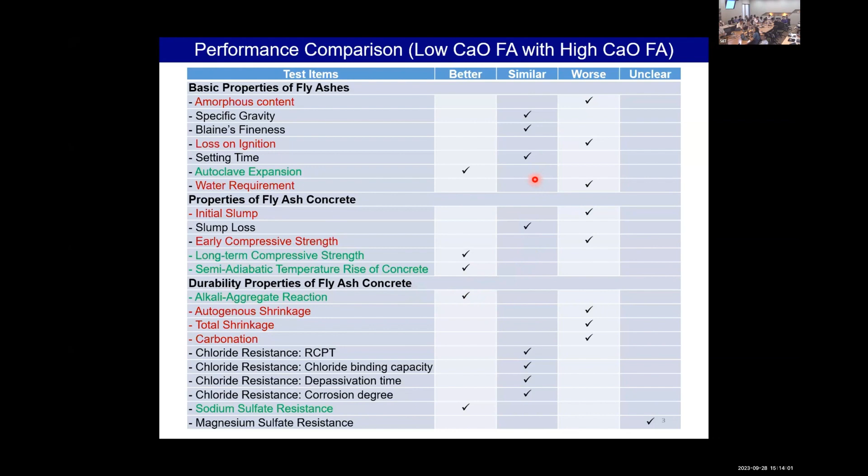For example, if we compare the properties of concrete containing low calcium oxide fly ash, properties like autoclave expansion, long-term compressive strength, temperature rise, or alkali-silica reaction of the low CaO fly ash are better than the high CaO fly ash. Some properties are similar, but some are worse.

So in Thailand, the Thai Industrial Standard for fly ash classifies fly ash into three classes. Class 1 is processed fly ash. Class 2 is the original non-processed fly ash, divided into 2A and 2B: 2A is low calcium, 2B is high calcium. And class 3 is for low quality fly ash.

This table shows the chemical and physical requirements for the fly ash. In Thailand, the fly ash used in the concrete industry follows class 2. Class 2 is divided into 2A and 2B based on calcium oxide content: if calcium oxide is less than 10%, it's classified as type A; type B has calcium oxide not less than 10%.

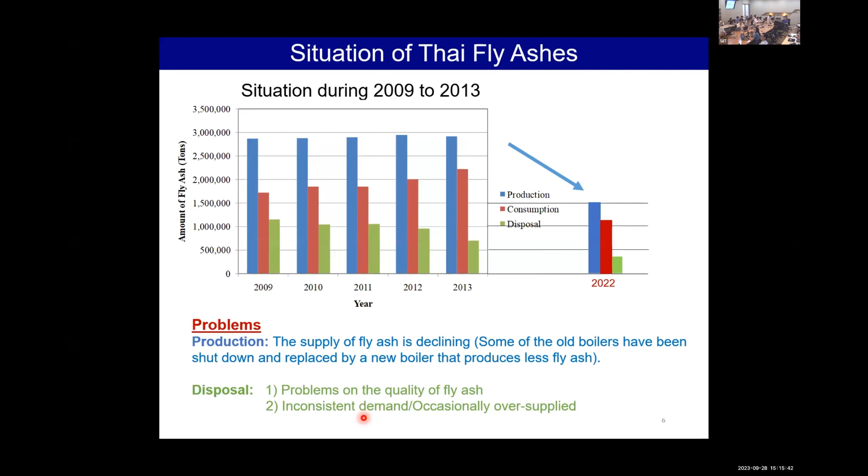For the situation of fly ash right now: about 10 years ago, fly ash production was about 3 million tons per year, but recently, last year, production of fly ash has been reduced. This is because some of the old boilers at Mae Moh power plant have been shut down and replaced by new boilers that produce less fly ash. There's also some amount of fly ash disposed of due to quality problems, inconsistent demand, and occasional oversupply of fly ash.

The problems with fly ash properties are: very high calcium oxide or low silicon dioxide content, high carbon content, high sulfur trioxide content, ammoniated fly ash, and lastly, dumped fly ash having high moisture content, or what we can call wet fly ash.

So in order to solve the problem that the amount of fly ash will be declining in the future, off-spec fly ash should be effectively utilized in concrete if its performance is better than OPC alone.

Let's start with the first problem: very high calcium oxide content or low silicon dioxide content. This graph shows data from EGAT, showing that the calcium oxide content tends to be increasing. This comes from the change in the coal properties.

When the calcium oxide content increases, the amount of silicon dioxide decreases. From this figure, we can see that in many samples, the silicon dioxide content is lower than the standard requirement, which is about 30% for the TIS standard. So the reduction in silicon dioxide may affect the reactivity of the fly ash.

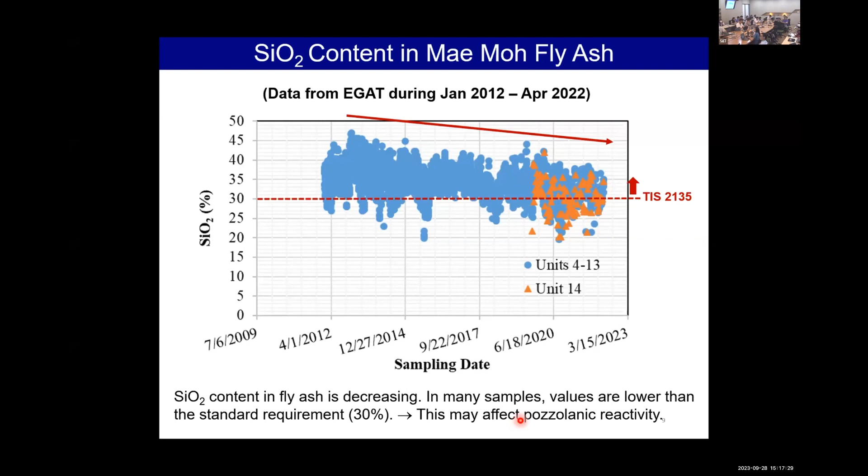This shows the relationship between silicon dioxide and the strength activity index at 7 days, 28 days, and 91 days. These are results from 3 laboratories: EGAT, ACT, and SIAT. We can see that even though fly ash has very high calcium oxide or low silicon dioxide content, the strength is not an issue.

And what about other properties? We also tested other properties, and we can see that many properties of the very high calcium oxide fly ash mixture are similar to the normal high calcium oxide fly ash mixture, and much better than cement or OPC only, like temperature rise, rapid chloride penetration, total shrinkage, and even sodium sulfate resistance.

For this data, it's questionable whether the existing standard for the limitation of silicon dioxide or calcium oxide is appropriate or not. So for this one, we may need to modify the minimum silicon dioxide or even the calcium oxide content in fly ash.

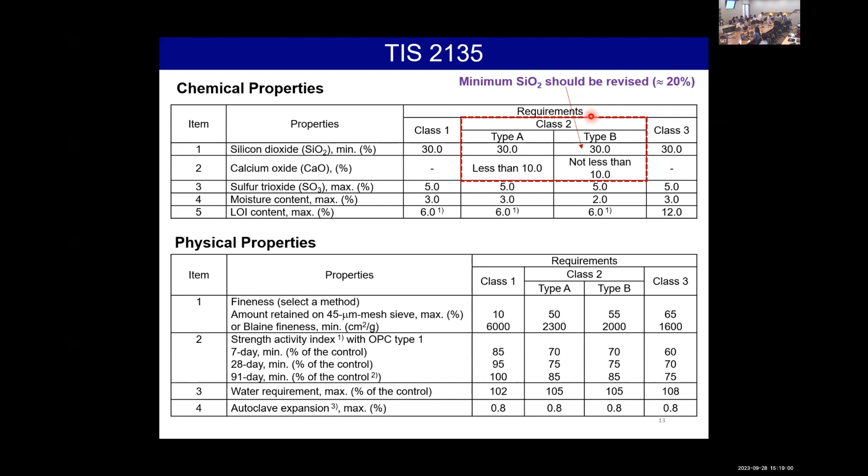Next problems are high free lime content and high sulfur trioxide content. This table shows the limitation of free lime and sulfur trioxide content. Actually for free lime content, the TIS standard has no limit. But in practice, we control the maximum free lime content to 4% based on our previous study. For other countries, ASTM or Japanese standard, there's no limit as well. It's only the EN, ISO, or Chinese standard that limit free lime to 1 for type F and 4 for type C.

We studied the properties of concrete or mortar containing high free lime and compared with low free lime fly ash. We can see that for the high free lime fly ash, it has worse properties in expansion, like autoclave expansion, alkali aggregate reaction, and sulfate resistance. But for autoclave and alkali aggregate reaction, the value is still better than OPC only. And of course, with high free lime content, setting time is faster, and for compressive strength, especially at early age, it is higher than low free lime fly ash.

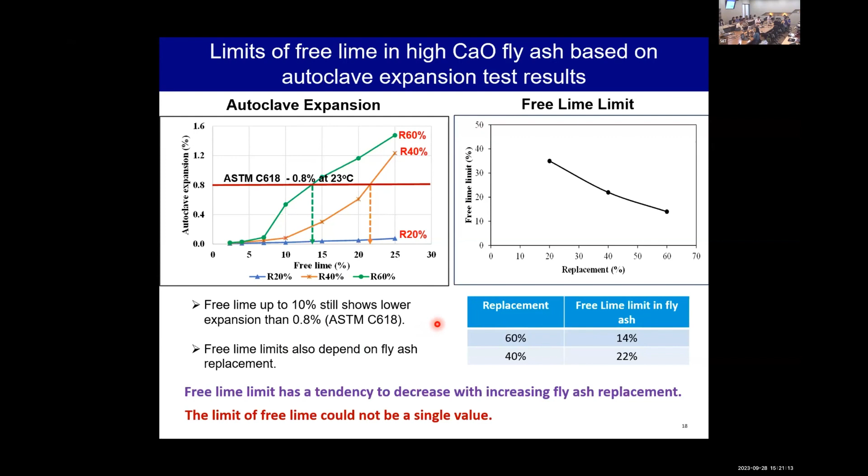Our recent research also studied to obtain the limit of free lime in high calcium oxide fly ash based on autoclave and sodium sulfate expansion. For the result, we can see that free lime up to 10% still shows lower expansion than the standard limitation. And after we obtain the limit of free lime, we can see that the free lime limit also depends on the fly ash replacement. So we can conclude that the limit of free lime could not be a single value.

We also tested sodium sulfate expansion, and from the result, we can see that even when the free lime content is increased, some values are still smaller than the OPC one. So for this data, we use the concept that the free lime limit is the maximum free lime content in fly ash that does not result in expansion greater than OPC type 1.

For our preliminary study, we can get the free lime limit. It can be seen that the free lime limit tends to increase with increasing fly ash replacement, and it tends to decrease with increasing water to binder ratio and increasing sulfur trioxide content in fly ash. So from this data, the free lime limit should be proposed considering these parameters, not just one single value.

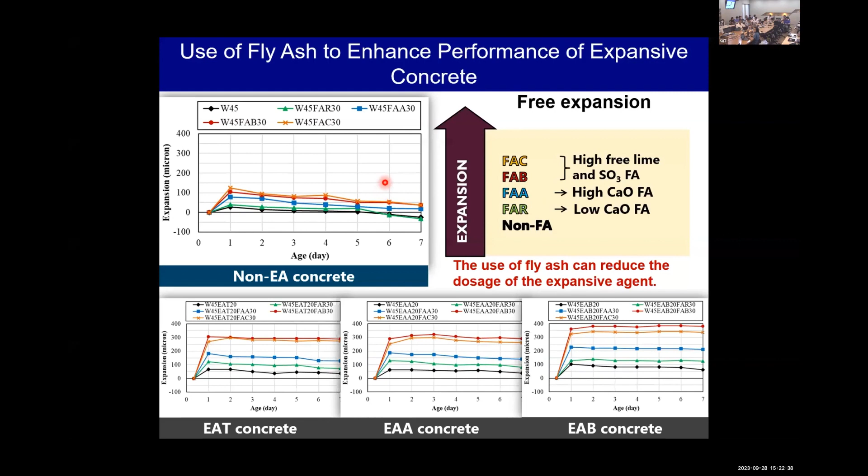High free lime and high sulfur trioxide fly ash can also be used in concrete to enhance the performance of expansive concrete. When we use fly ash, especially with high free lime and high sulfur trioxide content, the expansion of the expansive concrete is increased. This increase comes from producing more ettringite, which then increases the expansion. The mechanism can be found in our previous publication.

And not just the expansion, other properties like compressive strength can also be improved by using the high free lime and high sulfur trioxide content fly ash in expansive concrete.

Okay, next problem: ammonia contaminated fly ash. This comes from fly ash from boilers that use SCR technology to reduce NOx. For this process, we need to inject ammonia, and the ammonia can contaminate the fly ash. So for this case, we took samples from boilers with SCR that may contain ammonia contaminated fly ash, and tested basic properties like water requirement and strength activity index.

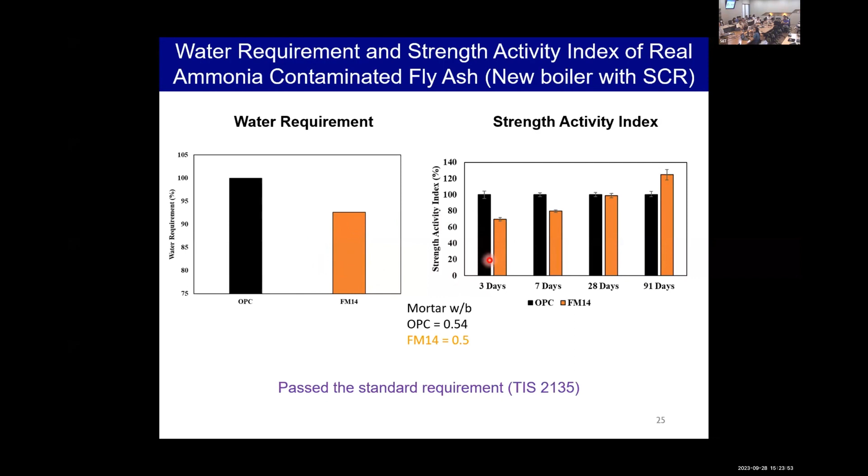We found that the fly ash from this type of boiler passed the standard requirement. Actually, for this sample, the contaminated amount may be very low. So in our study, we extended it to add ammonium salts like ammonium sulfate and ammonium carbonate, which are the common types of salt that may contaminate the fly ash, into our sample, varying the concentration of ammonia up to 1,000 ppm.

The results show that for mortar flow, the flow can be increased when the fly ash contains ammonium salt. For compressive strength, it decreases with the ammonium sulfate contaminated fly ash, but for ammonium carbonate, compressive strength can be increased.

For autogenous shrinkage, it can be reduced. But for total shrinkage, ammonium sulfate increases total shrinkage while ammonium carbonate decreases total shrinkage. For sodium sulfate expansion, when compared with the non-ammonium one, the ammonia contaminated fly ash increases expansion, but when compared with OPC only, the value is much lower than OPC. This table shows the summary of the performance of paste and mortar with ammonia contaminated fly ash compared with non-ammonium one.

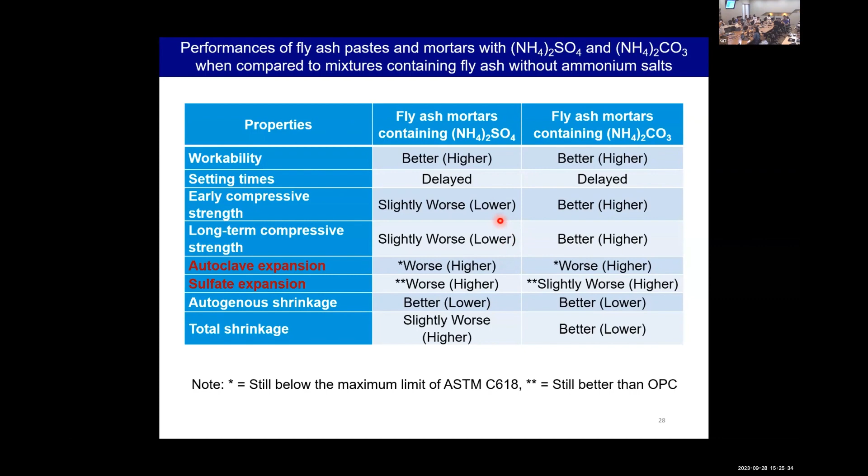Okay, for the last one: the problem about damp fly ash that has high moisture content, or wet fly ash. This is the BLCT fly ash data. We can see that there is some disposed fly ash that has to be dumped inside the power plant. This comes from the problem of inconsistent demand and occasional oversupply. Therefore, the fly ash is sprayed with water to get moisture content above 15% to 20% and dumped. So we made fly ash wet, and conducted tests comparing wet and dry fly ash.

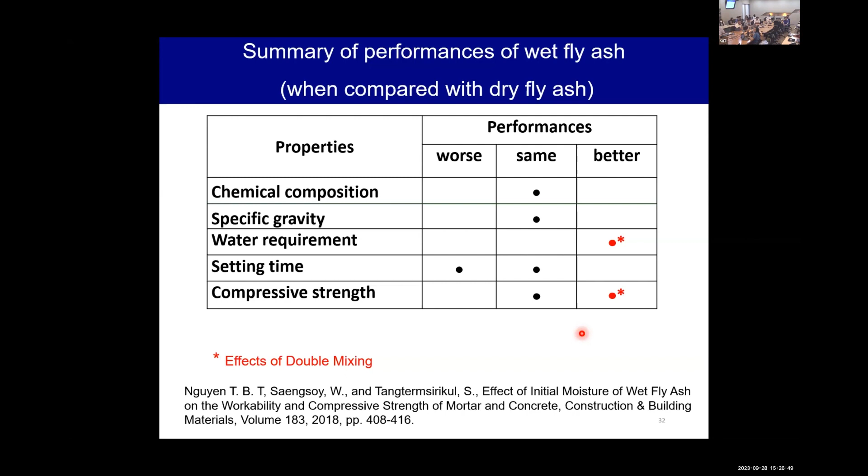We found that the wet fly ash has similar properties to the dry fly ash, but also gets better performance in terms of water requirement and compressive strength. This comes from the effect of double mixing from the pre-existence of water in the fly ash. We also published the mechanism in one paper.

We also studied the feasibility of using wet fly ash in ready-mix concrete plants, comparing wet and dry fly ash. For wet fly ash preparation, we prepared it in slurry form with moisture content of 60%, and tested at the ready-mix concrete plant, checking slump and compressive strength. Results show that wet fly ash has higher slump than dry fly ash, better slump loss, and equivalent compressive strength to dry fly ash. So we can conclude that wet fly ash or fly ash slurry can be used to produce ready-mix concrete.

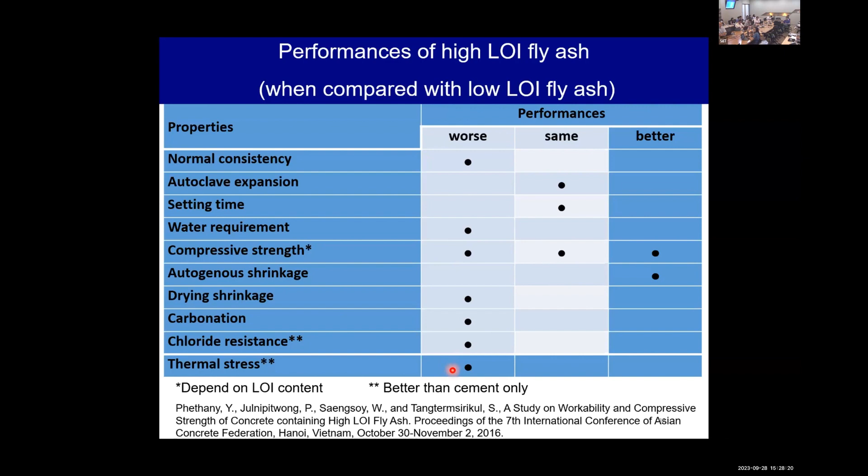The last one is a study on high LOI fly ash. Actually, this problem is from Vietnam, not Thailand. We also studied some properties comparing low and high LOI fly ash, and the results show that high LOI fly ash can produce higher strength if we properly optimize or adjust the mix proportion. For workability, even though high LOI fly ash is worse than low LOI fly ash, it is still better than OPC only, especially for properties related to temperature and thermal cracking.

In this case, the results show that the temperature of the high LOI fly ash is lower than OPC, and the restraint stress of the high LOI fly ash is lower than OPC. So it means that high LOI fly ash is very effective for thermal cracking control in mass concrete.

Okay, for conclusions and recommendations, we can see that many off-spec fly ashes have high potential for use in concrete, and more study on the use of off-spec fly ash should be carried out. Lastly, the standard specification for fly ash should be modified to allow for the beneficial use of some currently off-spec fly ash in concrete.

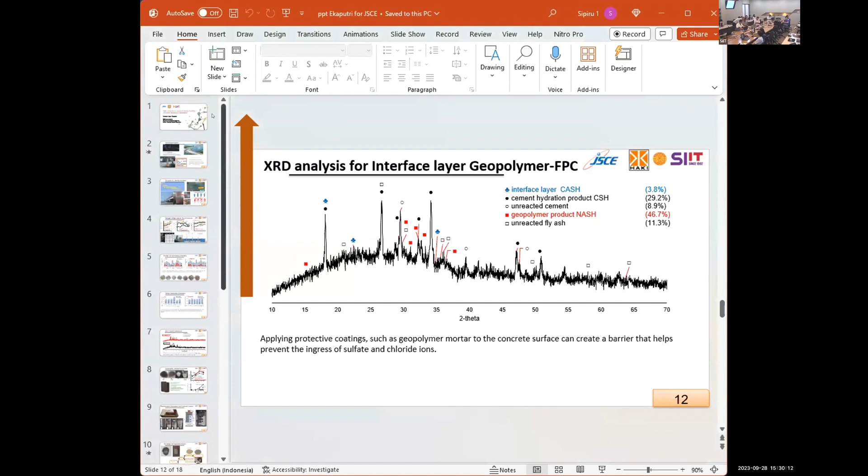Thank you very much for the invitation to the Director of International Divisions of JSCE Concrete Committee, Professor Nagai, my senpai, and to the distinguished speaker and moderator, also my senpai, Professor Asamoto. I would like to share our current research on high volume fly ash concrete and geopolymer in marine conditions.

I also work as a lecturer at ITS, Institute of Technology 10 November di Surabaya, and also as director of Geopolymer Indonesia. As we know, Indonesia is the biggest country in ASEAN with the longest coastal line, with 17,000 islands surrounded by seawater.

As the sea covers almost 71% of the territory, we have many bridges and ports exposed to the sea environment, as well as structures in the coastal area.

We are aware that seawater contains chloride ions. When concrete is exposed to seawater for a long time in this aggressive environment, it will show problems related to durability and service life issues. Cracks, strength reduction, volumetric change, and rebar corrosion are some indicators of chloride ion attack.

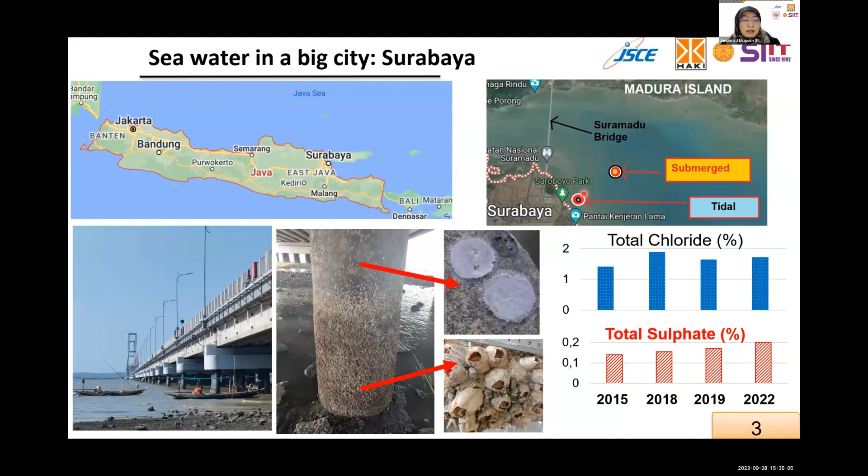This study is still ongoing, but I will share the current research. With high volume fly ash, where cement is replaced by more than 40% fly ash, we hope the concrete becomes more durable and resistant to sulfate and chloride attack.

At room temperature, with 50% cement replacement, class F fly ash shows less strength than 15% fly ash concrete. The condition is the same after submerging in seawater for around 8 months.

However, if we apply bottom ash to replace around 10% of sand, the effect of internal curing results in a positive contribution to strength. It seems that the pozzolanic reaction is guaranteed by the internal curing or internal moisture.

And here is the class C fly ash, as expected, as the previous presenter also showed.

We use 60% fly ash to replace cement, and the strength is still increasing, approaching the specimen with 25% fly ash and 0% fly ash. We believe that rich calcium and silica in the system contribute to more secondary calcium silicate hydrate formations.

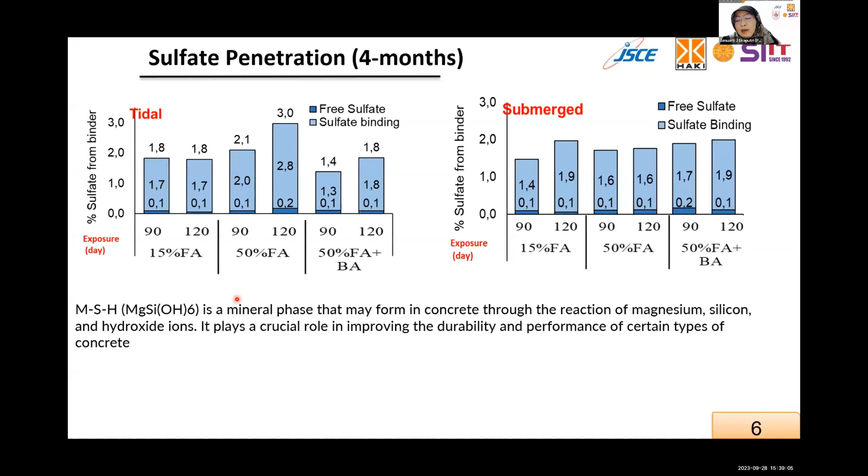We understand that calcium-based material is still very weak against aggressive ions. It is a very good idea to use very low calcium materials to cover and protect the existing concrete.

Let us see something very good about geopolymer concrete. Geopolymer material has gained recognition and popularity in recent years, primarily due to its environmentally friendly properties and potential applications in various industries. Geopolymers are inorganic amorphous materials formed through reactions of aluminosilicate source or precursors with an alkaline activator. So here we can replace 100% Portland cement with SCM, and also replace water with the alkali.

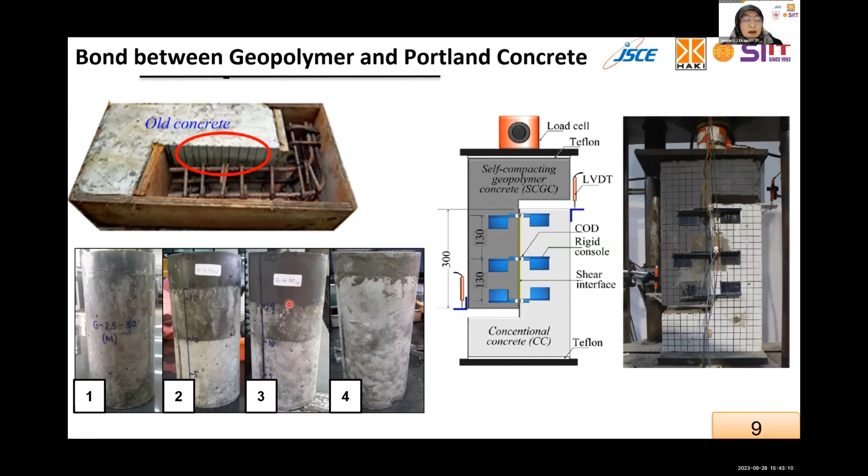It has a very great bonding system to calcium-based material. So for example, if we have an old concrete and then attach geopolymer concrete, it will have a very good bond. It is also very interesting to see that it can cover conventional concrete as a patching, and also as a cover. So it can act like a protector for repairing or jacketing of concrete.

This is the conventional mixture of geopolymer mortar. We have binder, mainly consisting of fly ash, and we can put another cementitious material like rice husk ash, or we can use GGBFS, blast furnace slag, to replace the cement in the binder. We also use alkali activator to replace the water. As a filler, we can use fine aggregate or coarse aggregate, depending on our mix design.

And this is the one that we made. The core is FPC, meaning Portland cement containing 20% of fly ash, surrounded by geopolymer mortar to cover it and protect it from the seawater.

As geopolymer attaches very well to the FPC concrete, it creates a very thin but strong layer between these materials. This is the FPC, and this is the geopolymer. We found that the interface layer is very thin, less than 1 millimeter. By using micro camera observations, we can see that the geopolymer penetrates the surface of the FPC and creates another mineral. This is what we found.

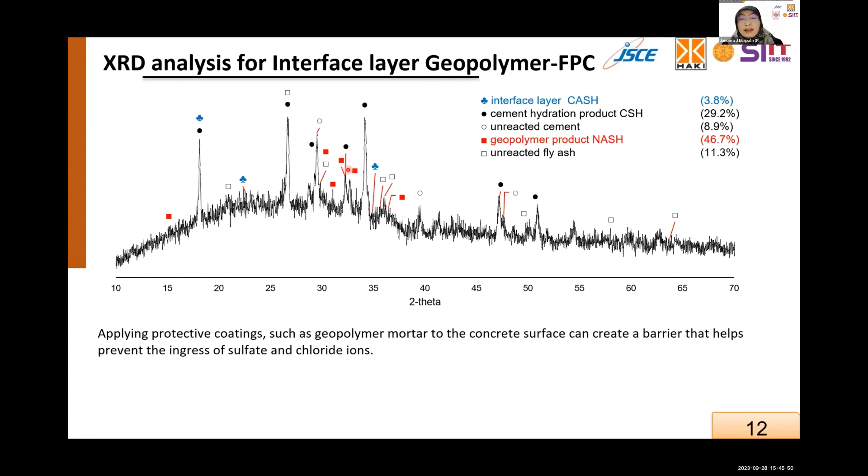The bond strength of geopolymer mortar is much better than the bond strength of PC mortar. We are aware that a cover thickness of 5 centimeters is suitable for inner concrete. So this thickness here is 5 centimeters.

This is the result when wrapped concrete was immersed in seawater, compared with jacketing made with PC mortar. A decrease of strength in wrapped concrete with FPC is shown here. However, wrapping with geopolymer mortar shows better mechanical properties. Maybe the sulfate already attacked the FPC wrapping.

In the system, as the pH increases, this shows that the releasing of hydroxyl ions is a sign of the decomposition of calcium silicate hydrate. At the 5 centimeter depth of mortar, at this inner cover point, both geopolymer and Portland mortar showed chloride binding, where free chloride ions were found in both systems.

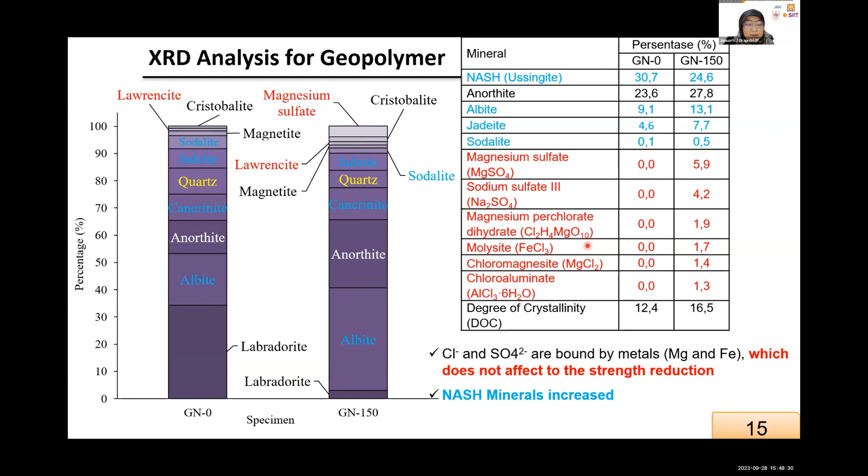Micro cracks may occur arising due to shrinkage, and maybe because of the expansion of magnesium sulfate. As the porosity of the geopolymer matrix increases in density, it becomes evident that silica derived from rice husk ash, silica fume, or blast furnace slag plays a very important role in sustaining continuous geopolymer reactions. Therefore, it inhibits the ingress of chemical attack to the matrix.

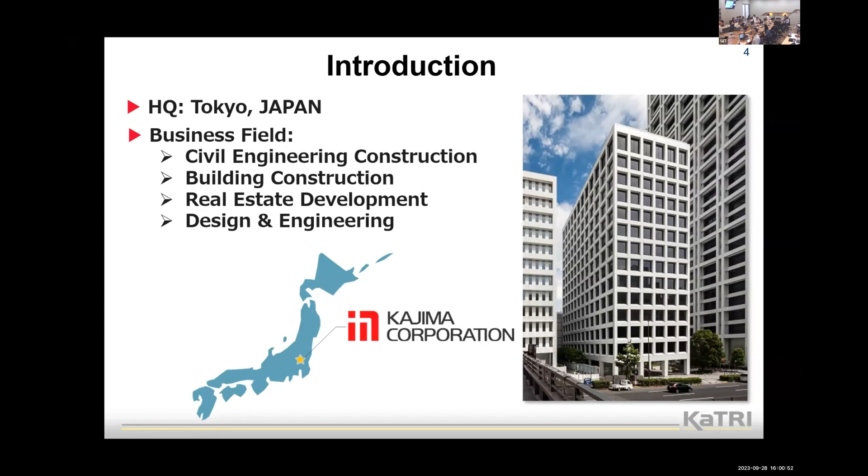The headquarters of my company is Tokyo, Japan, and the business field of my company is civil engineering construction, building construction, real estate development, design engineering, and so on.

Paid capital and our revenue is shown in this slide. Employees are almost 20,000 people, and this number includes both domestic and overseas. In Thailand, Thai Kajima is a group company of my group.

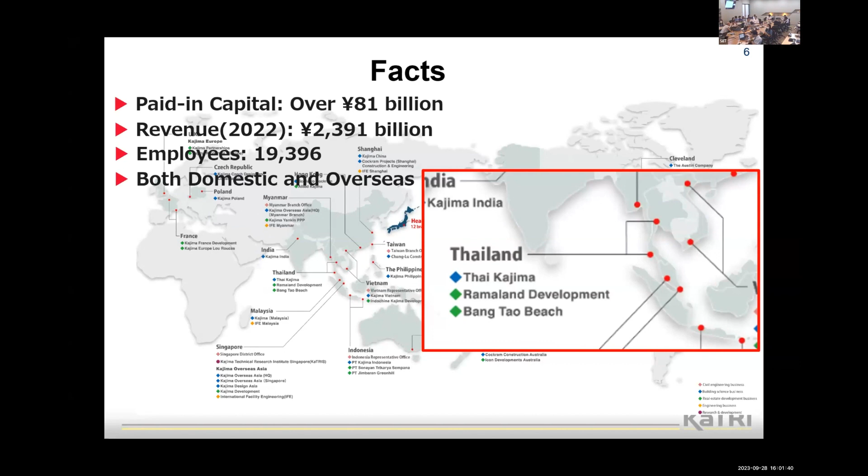For example, for big size dams, RCD, roller compacted dam concrete, is used also in Japan. For concrete dams with a height over 50 meters, we use RCD concrete as the inner part of the dam concrete. The slump of the concrete is zero, and it's very hard. The water-cement ratio, or water-binder ratio, is 65 to 80% almost.

The unit weight of binder is about 120 per cubic meter. So the dam RCD concrete is very hard. We transport it by dump truck like this, and then spread it with a bulldozer almost 1 meter in height at one layer. So many layers are spread in the dam concrete.

At my work site, my dam is about 100 meters in height, so about 100 layers are spread in the concrete dam.

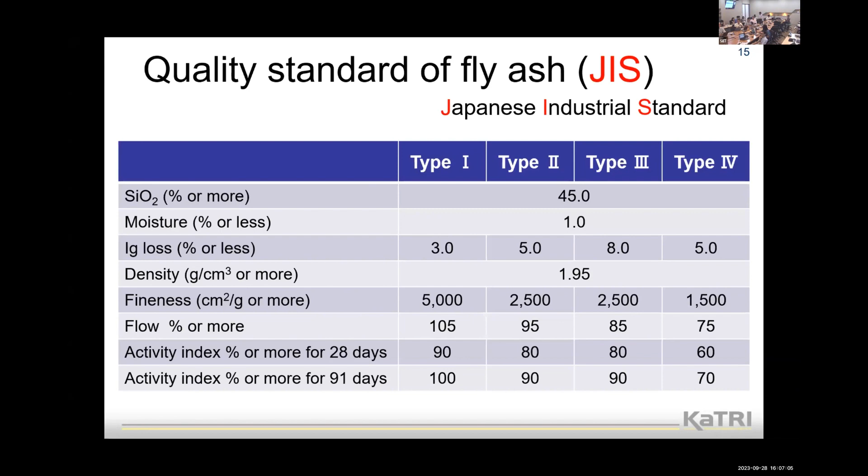Almost all dam concrete uses type 2 fly ash. In addition, at most construction sites, beyond JIS standard, detailed rules for fly ash are decided.

Sorry. The JIS standard value is here, but we are required to set the target value and the ranges. So it's very strict quality control that is required for our company and also for the contractor or cement manufacturer.

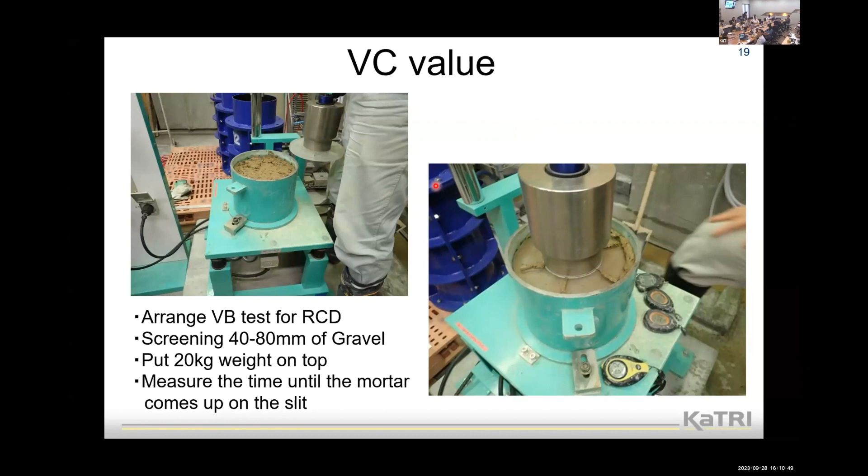At the dam construction site, we often use gravel with a maximum size of 80 or 150 millimeters. In our site, the maximum size is 80 millimeters, so we screen 40 to 80 millimeters of gravel and put the weight on top. This weight shakes the lower table, and we measure the time until the mortar comes up through the slit. This is the VC value test, which we use to estimate the quality and press property of dam concrete.

We often estimate compressive strength at 91 days, but as you know, from 91 days the compressive strength increases for 2 years or more. When the water-to-cement ratio is high, the increase is even higher. For number B2, where W/C is 75%, the compressive strength from 91 days to almost 2 years nearly doubles.

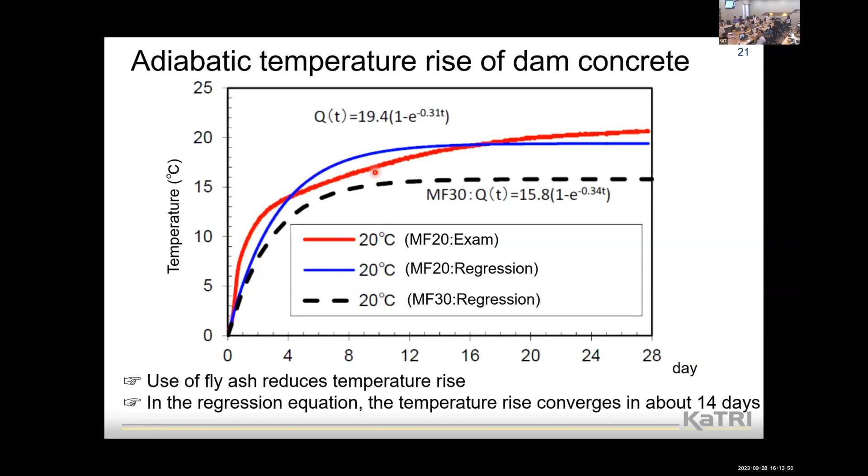On the other hand, we try to check the adiabatic temperature rise of dam concrete. The red line shows examination data of MF20. Use of fly ash reduces the temperature rise by about 20 degrees Celsius, but is it saturated or not? I don't think it's saturated at 28 days. But in the regression equation, shown by the blue lines, the temperature rise converges in about 14 days. That's the estimate. We use these equations for thermal stress and thermal crack simulations. But that is a contradiction: compressive strength of dam concrete using fly ash increases over several years, but temperature rise of the concrete converges over 14 days.

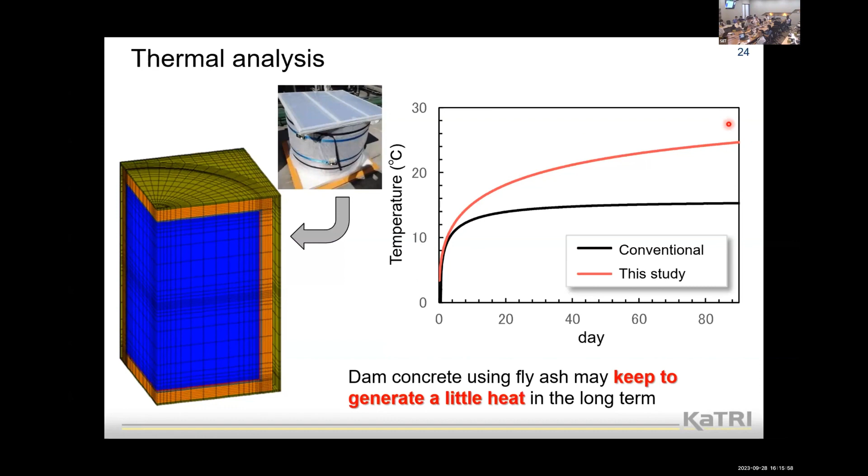So that's the conclusion of my presentation. In Japan, fly ash is used under strict control in concrete dams, and the compressive strength of concrete using moderate heat fly ash cement increases over the long term — this is something most of you already know, I think. But if construction speed increases and heat radiation is reduced, heat may accumulate in the dam. That's what I think. So that's the end of my presentation.

First, the fly ash we use for our concrete is sourced from the power plant in Jeneponto, South Sulawesi, Indonesia, on Sulawesi Island. The source of fly ash is from the Jeneponto power plant with a capacity of two times 125 megawatts, located in Jeneponto Regency, South Sulawesi, Indonesia, at a distance of about 82 kilometers from Makassar city, where our factory is located.

Now, the characteristics of the fly ash. Based on the fly ash sample characterization test data, there are several important mineral contents in fly ash that indicate the type or class of fly ash. From this characteristic test, we can see that this class of fly ash is Class F, because the total of silicon dioxide, aluminum oxide, and iron trioxide is more than 70%. This is the class of fly ash that we use for our factory in Makassar.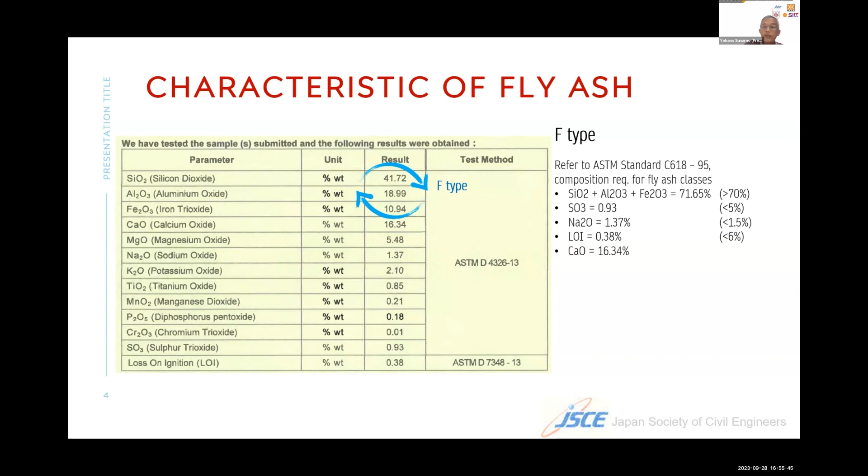Okay, so we already use fly ash, about 10 years ago we started using this fly ash from this factory. So if we talk about the benefit of fly ash usage in concrete industry, there are three aspects we can see.

The first is the technical aspect. The following are the benefits of fly ash in concrete, both in fresh concrete and hard concrete condition. In fresh concrete, it's about workability, decrease the bleeding, segregation, and low heat hydration. In hard concrete, it's about strength and durability, permeability, corrosion resistance, and self-healing.

The second benefit is from the economic aspect. We get the following benefits. First, we can reduce the cement cost. Cement is the largest component of the material cost of concrete production. So by utilizing fly ash as a supplementary cementitious material, where generally the unit price of fly ash is cheaper than cement, the greater the percentage of fly ash, the cheaper the cost of the concrete material.

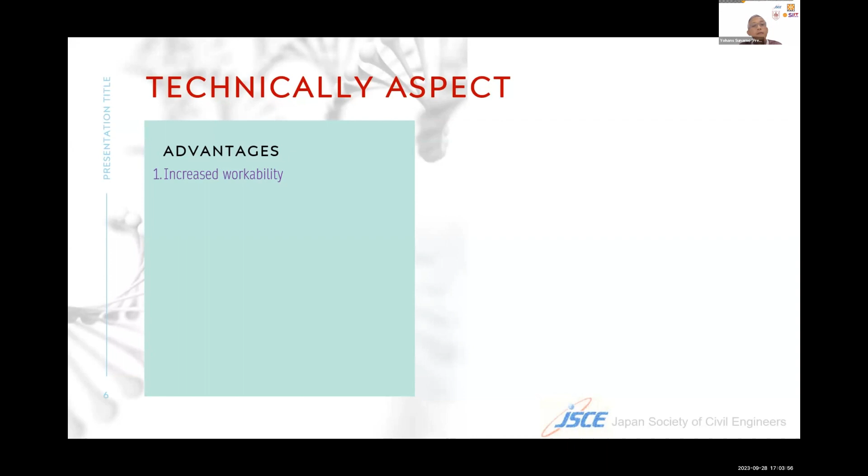In our product, some concrete that uses high volume fly ash concrete behaves like self-compacting concrete, so the slump is very high, making it easy to cast the concrete on site. Second, decreased bleeding and segregation, since the physical characteristic of fly ash can improve the cohesiveness of fresh concrete.

The third, increased compressive strength. Fly ash causes low initial compressive strength in concrete up to 28 days, but after 28 days, the increase in compressive strength continues until more than 120 days.

The fourth, increased resistance to alkali-silica reaction. Five, increased resistance to sulfate attack. Concrete with fly ash can anticipate conditions in coastal areas where the influence of seawater or sulfate attack can damage concrete performance.

Six, less heat generation during hydration. It's very helpful in mass pouring casting, where usually the thickness of the concrete is quite large, sometimes 1 or 1.5 meters. In this condition, if there is a temperature difference, it may cause a problem, because during hydration the temperature of the concrete increases.

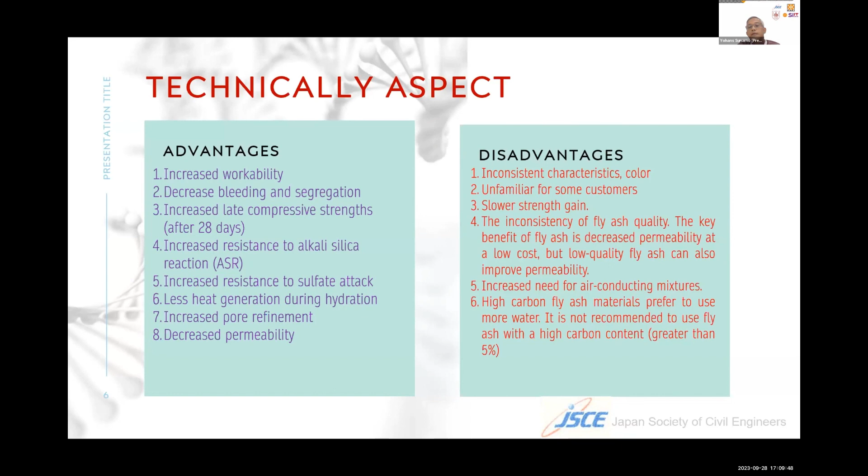In our current application now, we already use fly ash at a percentage of about 35 to 40%. For retail projects, we always use a fly ash content of about 25 to 40%, except if the project has special requirements.

The second application is about custom specification projects. Last year we had a project in our city with mass pouring of about 2,300 cubic meters. The project name is Sudirman Street Tower. The pouring must be finished within a maximum of 36 hours, with grade FC 30 megapascal, and the request for temperature was a maximum of 32 degrees Celsius.

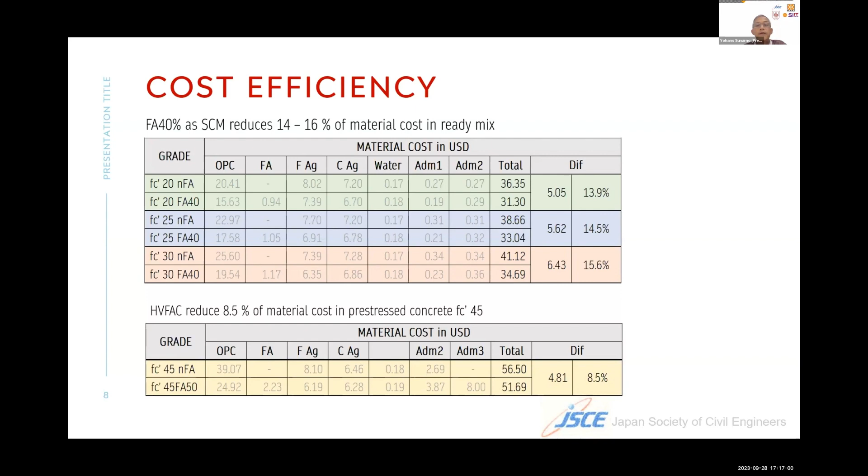So what is our next plan for the application of fly ash? We are still researching in our laboratory, and we want to increase the fly ash content in the concrete. Our target is up to 80% fly ash.

Next, we're planning to produce railway sleepers with high volume fly ash concrete. We know this application has been used in Australia and Japan with geopolymer products. In Indonesia, where the influence of the marine environment is very dominant, it's important to research the application of high volume fly ash concrete for rail sleepers.

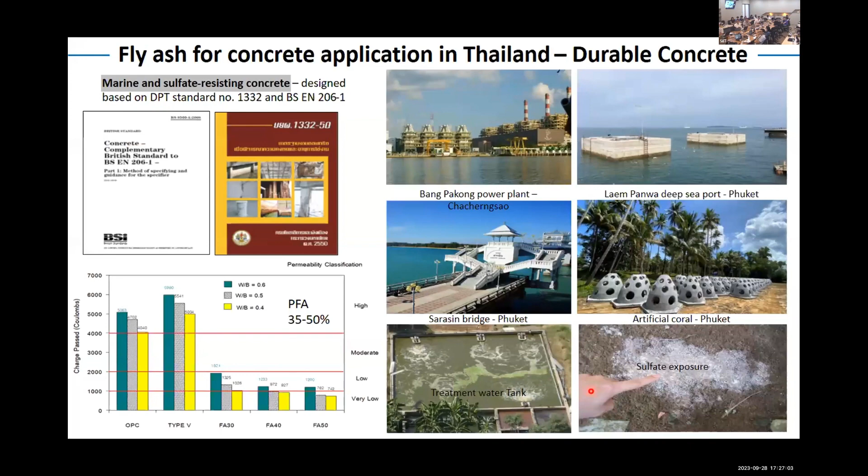So the benefit of fly ash is that it resists chloride content very well. The chloride penetration becomes lower when you replace more fly ash and reduce the water cement ratio. This is some project used in Thailand for sulfate resistance as well, some water treatment tanks and soil with sulfate conditions. This is a benefit of fly ash for durability.

Also, as I mentioned, for the floor and waterproof concrete, we found some effect from the fly ash when the concrete cracks and gets fed with moisture. After the moisture comes to the structure, it can heal itself. So that's the effect of fly ash as well.

So this one just wants to show you what applications we use. For self-compacting concrete, we use it a lot in Thailand right now, for thin shell structures like this that are difficult to cast by people and difficult to vibrate the concrete. We use self-compacting concrete, even for congested reinforcement. This one, I think, is close to SIIT here and Thammasat University.

The expressway at Chiang Rai - I think Professor Sunarno was also involved in this project for casting self-compacting concrete and so on. Many structures are repaired using fly ash. This one used around 40 to 50% fly ash to repair cementitious material.

And it's used for high strength as well. I saw it here for the vertical member and also the horizontal member like a slab. We also tried to make a pump simulation for the concrete. You can see here the pump line - the distance of the pump line here is about 600 meters. We pumped the concrete in and observed the concrete out with no problem when we used fly ash like this. So many applications in Thailand use fly ash so far.

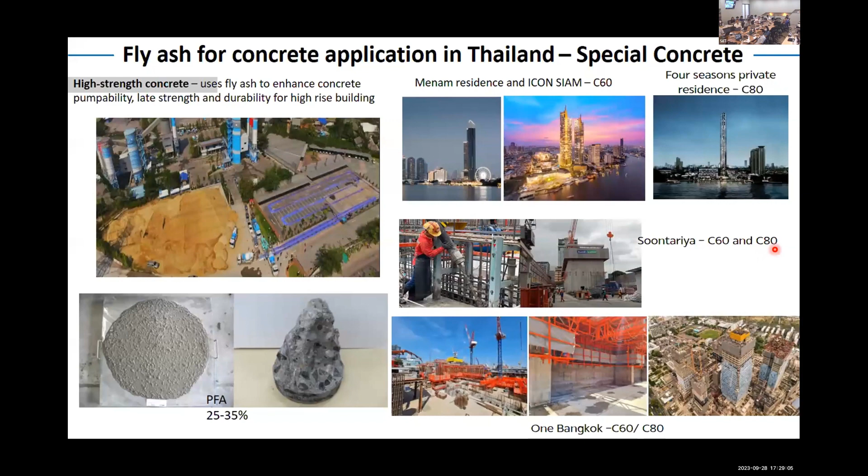Right now we generally use it for C80 high strength concrete in Thailand. Okay, this is some background on the application of fly ash in Thailand.

So this is the highlight I would like to give you information on. As I mentioned, we use fly ash for low heat concrete structures, like a mat foundation. This is our past record in Thailand of producing concrete using high volume fly ash. You can see the years here, since 2014 to 2020.

This is the mat foundation we've used so far, high volume fly ash, continuously poured in one time. The first one has a volume of around 8,000 cubic meters with the strength here. We replaced fly ash around 50%. You can get the temperature numbers here and the thickness of the structure. You can see the first one, Menam Residence, is around 3.4 meters.

The next one is more challenging, but the strength is not higher - it's almost equal. Sorry, this one is around 28 MPa, and the volume of concrete becomes higher, 12,000 cubic meters, continuous pouring, but the strength is not high so it's not much of an issue. But we used fly ash around 60% to replace the cementitious material. The interesting thing about this project is the thickness is quite high, 8.75 meters - this is quite a high thickness of mat foundation that we've ever produced, but it's not a big area, just only in the core of the foundation.

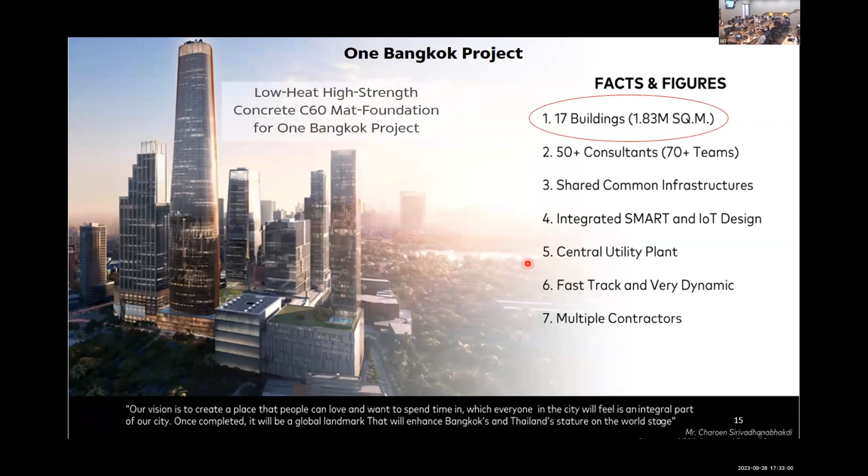This is a very big one from our experience in Thailand. You can see here a lot of mat foundations that are cast concrete. But today the highlighted one is here, O4H4. If we cast concrete in one go and achieve that, it's going to break the record for the largest cast in Southeast Asia so far.

This one requires, as I mentioned, C60, and we have to think about the low heat property of the concrete. So I will give you more detail. Before doing that, when we start the meeting with all parties before the project begins, for the mass concrete and kind of mat foundation like this, we have to concern about two items.

The first one is the differential temperature of the structure. In general, the core of the concrete gives a higher temperature at the limb of the structure, and the edge of the structure gives a lower temperature. So if there is differential temperature, there's a chance the concrete will shrink and expand differently, and that means there's potential to crack. That is a thermal crack. We have to concern about this because we have to put some rebar to control the crack around this area.

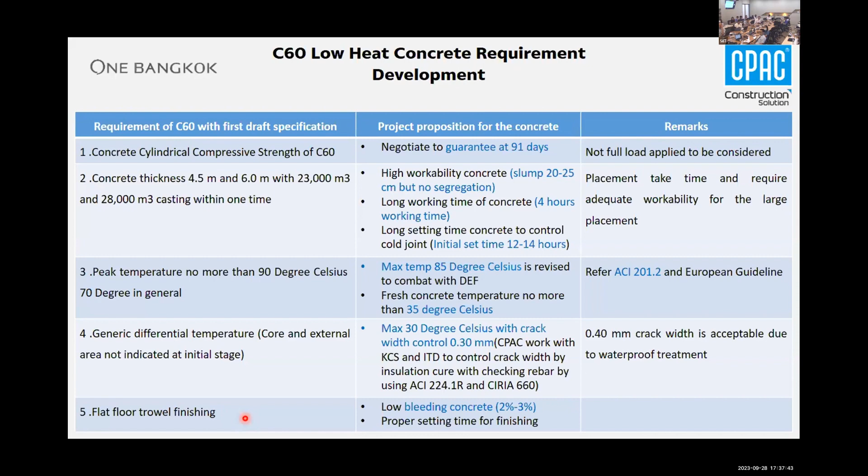The crack width control for this project is around 0.4 millimeters, which is acceptable, because after this they're going to do a waterproof treatment on the structure. We also need low bleeding concrete, because after casting the foundation, they will trowel on the surface to make a car park area, so they don't need to do a topping again. This is what we were working on.

You can see here, we developed the concrete for this project using 60% PFA or fly ash to replace the cementitious material. The cementitious material for this mix is around 500 kilograms per cubic meter. And this is how the concrete looks like.

And you can see here the slump retention at 4 hours. And this is our lab test after we do it, you can have a look at this. We get the strength around 56, up to 70 MPa. This one is in cube, but we can convert around 65 something. This is in our lab, and we try to check the shrinkage as well.

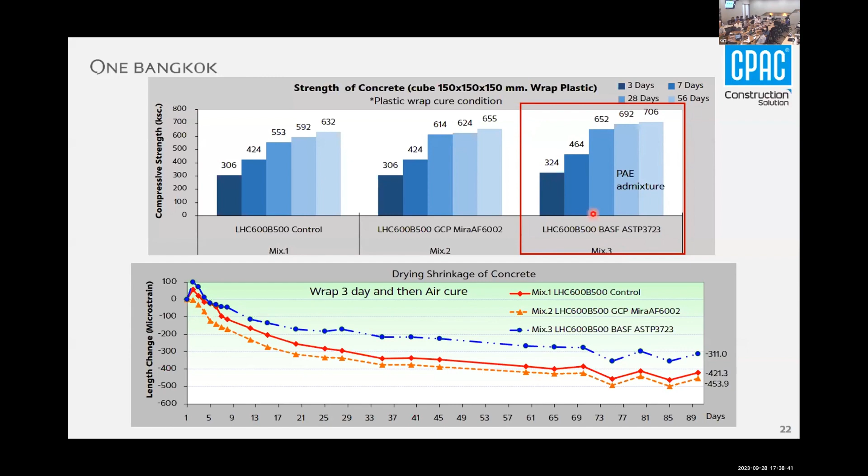And we select the proper admixture to be used for the project. And rather than only the concrete material itself, we have to think about the structural design, because they design the steel rebar from the structural point of view.

But for this one, we closely worked with SIIT and Professor Somnuk to give them the model to simulate the structure of the mat foundation, because it's a new one. Everyone was concerned about the structure and the thermal crack, because it's very high depth and also very high strength.

So for this one, I got information from Professor Somnuk. He has a lot of models, and the model is quite excellent. It covers all aspects - the total heat generation from different kinds of material, the temperature prediction of concrete, the heat conductivity, heat transfer coefficient, combined all together, and even the environmental factor. We have all these aspects combined as a model, and after that, we calculate the structure.

What is the tensile strain that's going to happen in the structure? After that, we put the rebar to control the crack. This is overall quite excellent work from SIIT.

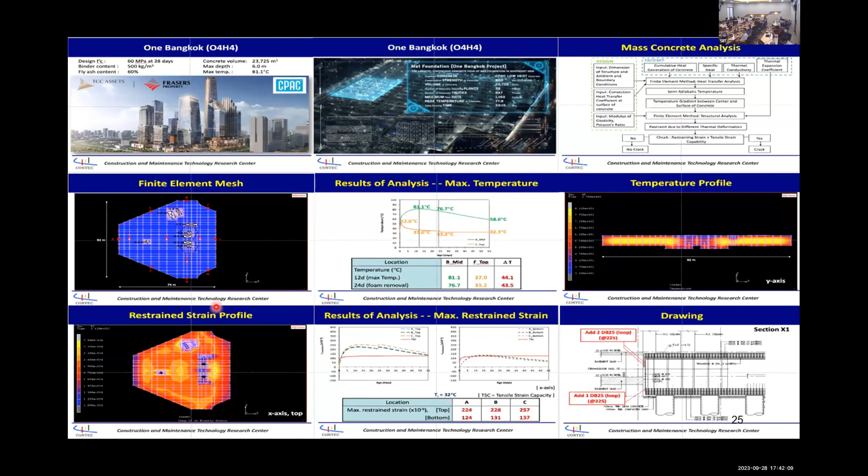SIIT and the team analyzed the structure in detail, and they got a peak temperature around 81, something like that, as I mentioned. We found that some areas needed more rebar to control the crack, particularly at the edge of the structure. This is some animation and photos from the analysis of the SIIT model.

And even with the models, after that we changed the cement used. So we tried to understand and make sure that when we changed the cement type, it would work well alongside the model. So we did some adiabatic tests at lab scale, comparing OPC cement, ordinary Portland cement, with the moderate heat cement.

And we found a temperature reduction of around 3 degrees Celsius. After that, we were quite happy about this one.

After that, we moved to the plant scale. We made like a 1 cubic meter sample and compared the peak temperature again. We got the number again - 3 degrees Celsius - quite close to our lab test. So everyone was happy about this one.

So we went on and cast the concrete. You can see the number of trucks here, a lot of trucks, and we had pumps alongside the trucks. As I mentioned, after they finished casting the concrete, this is what the concrete looks like, and the strength development of the concrete that we got. So it's quite good.

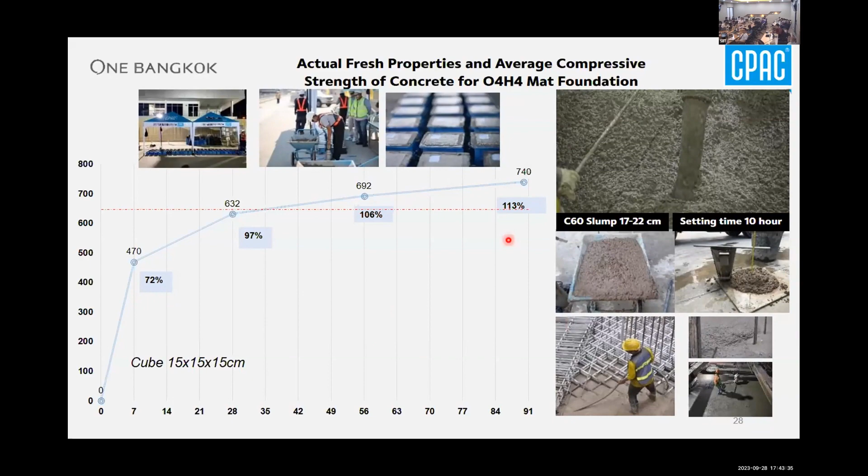It's around 18 degrees Celsius, something like that.

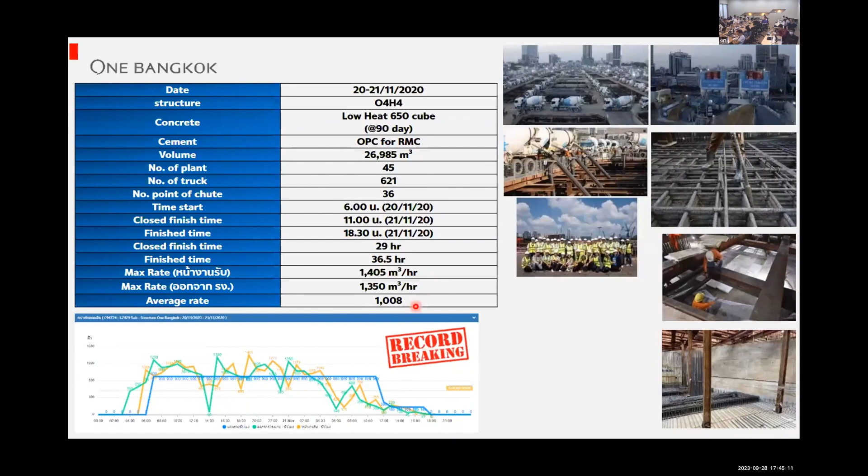Okay, the summary. So we have cast and achieved O4H4 for the mat foundation, 60 MPa. You can see the volume here, the number of plants supplying concrete, number of trucks, number of chutes. We spent around 36.5 hours casting continuously, and the max rate of supply is around 1,405 cubic meters per hour, with average around 1,000. So it's our pride project here.

After we observed the casting, we found some actual cracks, but very few. So it's acceptable for our party.

Okay, before I end, I just have a short video to show you our project here.

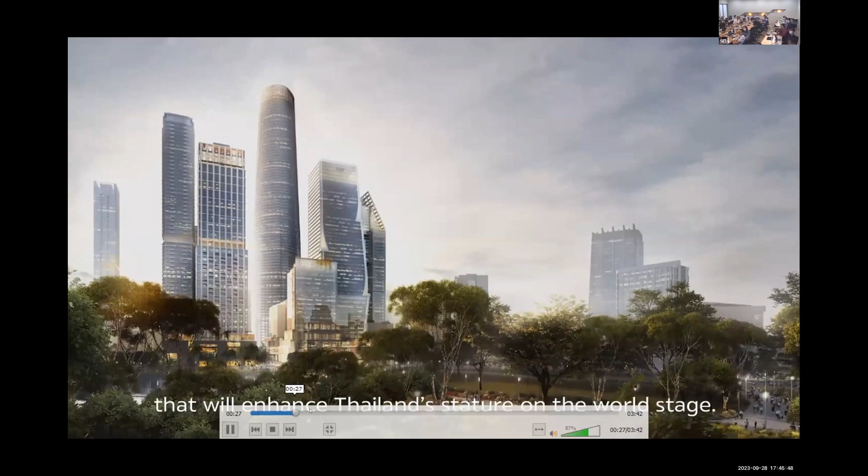You can imagine what the concrete looks like when we cast at the top side. Skipping ahead to give you an overview of the casting. You can see the number of trucks and the platform. This is the main contractor we worked together with on the casting. You can see the concrete pumping, shooting together, and there's a board showing in real time how much concrete has been cast.

Okay, this is the area. You can imagine it's quite a big area in the center of Thailand.

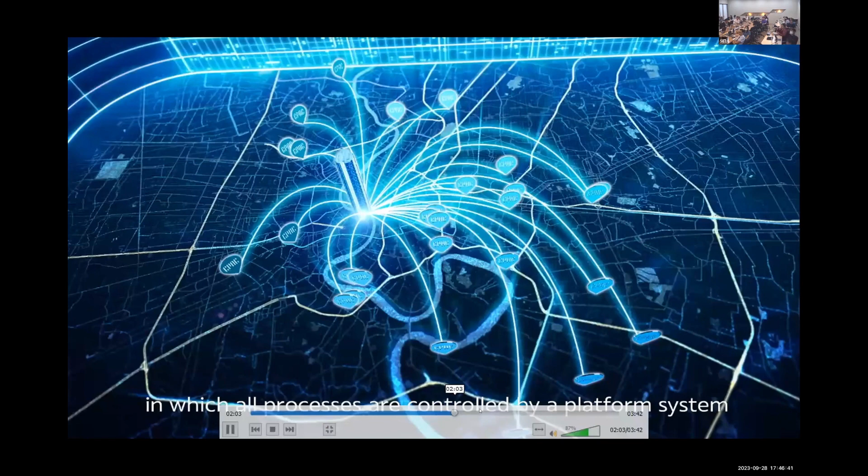And the challenge, as I mentioned, is C60, never done before for the mat foundation. A lot of people involved - it's not only about the concrete material, it's about the supply of concrete as well, and planning how to place the concrete at the position.

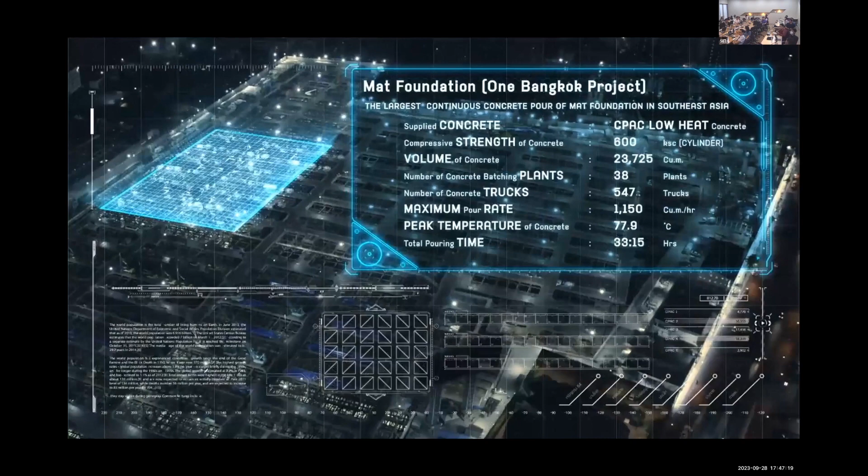Okay, this is actually not the highest one, but it's the previous one. The next one is higher, but we didn't make a video of it, though I already gave you the presentation. So that is my presentation today. I hope you enjoy this. Thank you, thank you very much.

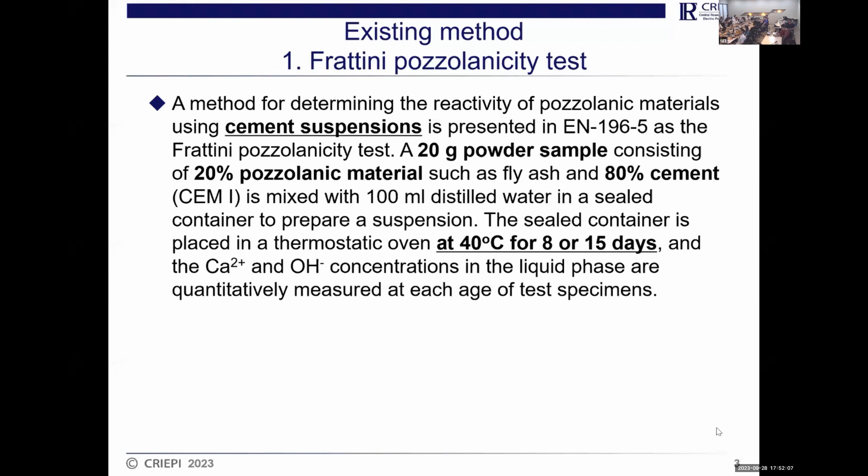The second one is like this: using calcium hydroxide, we mix 20 grams of samples, where 70% is pozzolan like fly ash and the other 30% is calcium hydroxide. It needs to cure for 28 days and 91 days for the paste specimens, and after that we determine the consumption amount of calcium hydroxide by TG-DTA.

And the third one is like this: the Chapelle test, modified. This was used in France, I remember that, and they use metakaolin in the concrete admixtures - this is not fly ash. Metakaolin has much higher reactivity than fly ash.

In that case, they mix 1 gram of metakaolin and quick lime, meaning CaO as free lime, 2 grams, and mix it into 250 milliliters of pure water. The reacting condition is 85 centigrade, keeping it for 16 hours, and we need to estimate the consumption rate of the calcium ion.

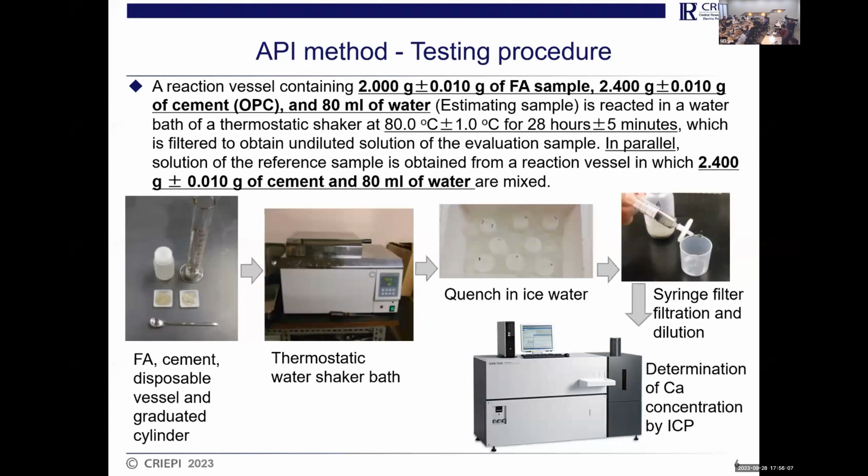We must keep it in the thermostatic water shaker bath, as shown in this picture. After 28 hours of curing, we take out the sample bottles and quench them in ice water. We need to cool down quickly. After that, using syringe filters as shown in the pictures, we must filter it, then dilute it to the suitable condition for each equipment, like ICP.

I'll show you a small movie like this. We shake it in 80 centigrade hot water for 28 hours. After that, we get the data partially for the difference.

We must obtain the concentration of calcium in the reference data, meaning obtained from the OPC system. Secondly, we must get evaluation data from the cement and fly ash mix system.

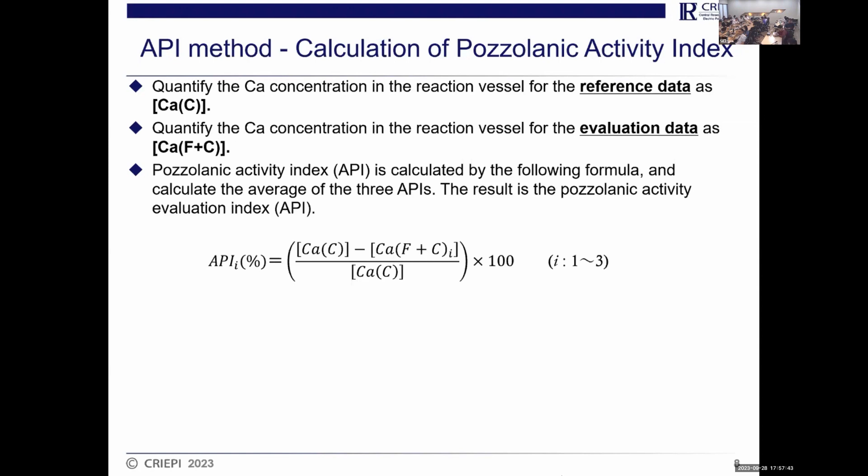It's like CA, F plus C. After that we calculate very simply, API equals like this. We obtain the data to estimate the consumption rate of the calcium ion from each solution. Small i means the repeat number. We must repeat 3 times and obtain the evaluation index like API.

Table 2 shows the glass ratio, the amount of glass in the fly ash, noted as the vitrification rate. The amount of glass is from 72 to 85%. And I'll also show you about the basicity.

Basicity is the amount of calcium, magnesium, and aluminum to silica ratio. The basicity is from 0.27 to about 0.5 also. There's much difference in the amount among these samples.

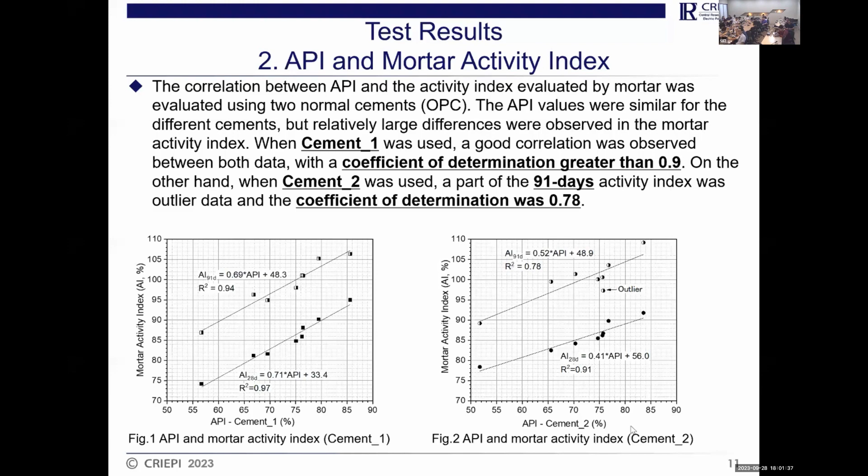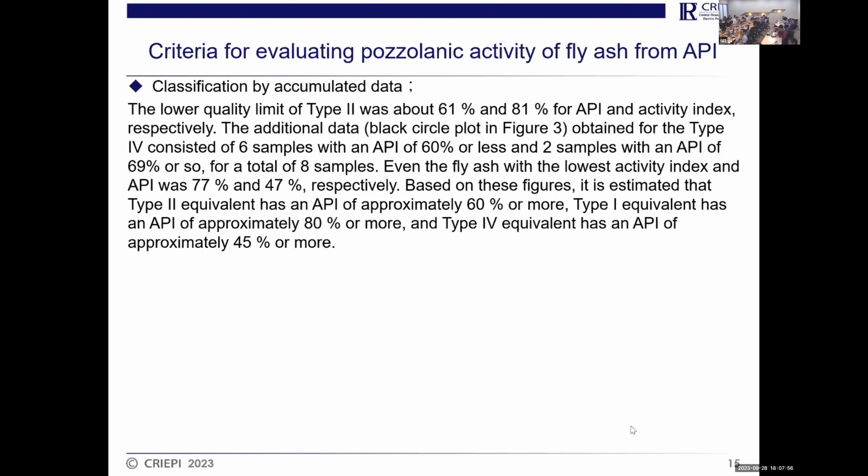This figure shows my interpretation during those last two figures, so I will skip this figure.

And I show you the summary. Based on the experience gained from many years of research at CRIEPI and the result of the round-robin tests conducted by producers and users, it was clarified that the pozzolanic activity of fly ash can be appropriately evaluated by the API method as well as the activity index by the mortar test. It is proposed to newly include in JIS A 6201 the criteria for judging pozzolanic activity of fly ash for concrete according to the API method, as follows.

For type 1, the lower limit is 80%. For type 2, the lower limit is 60%, and also in type 3. And for type 4, the lower limitation is set as 45%.

It's all my presentation. Thank you.

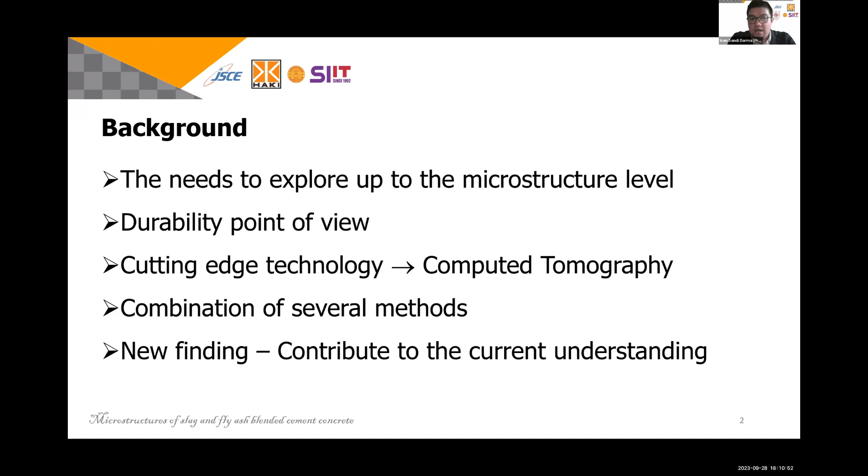And then from microstructure, we can also explore the durability aspects from the viewpoint of pore structure. In my presentation, I will try to introduce cutting-edge technology using computed tomography, combined with several methods, and final new findings in order to contribute to the current understanding.

As you can see here, cement-based material represents a multi-phase heterogeneous material that is strongly affected by the characteristics of each constituent. Therefore, we need to understand the microstructural characteristics.

Up to now, we apply MIP, mercury intrusion porosimetry, X-ray diffraction, as mentioned by Januarti senpai. Next, SEM, scanning electron microscopy, which can be combined with BSE, backscatter electron, and then transmission electron microscopy or TEM, nuclear magnetic resonance or NMR, and finally X-ray computed tomography.

For MIP, it's one of the most widely used techniques for determining pore size, but the drawback, as we know, is the bottleneck effect and also damage to the specimen during the pressure loading. For XRD, the drawback is that XRD is a non-destructive analytic technique, but it's only reliable when investigating crystalline compounds. For SEM, we know it's only 2 dimensional.

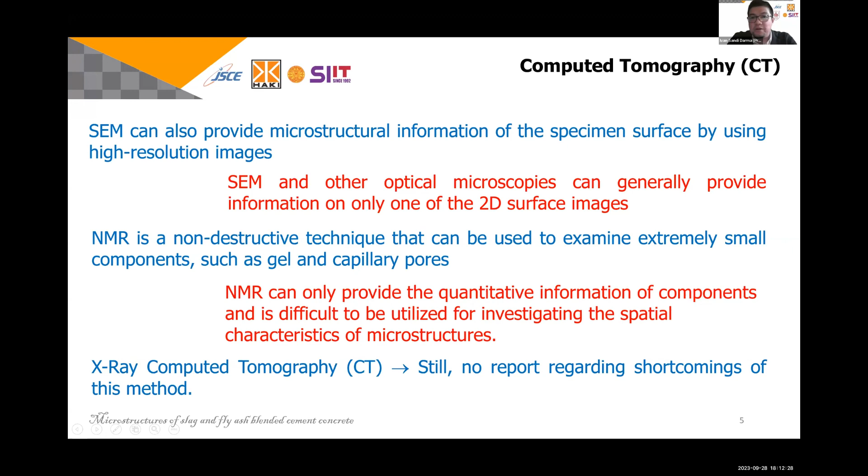NMR is quite difficult for investigating spatial characteristics. But for X-ray, up to now, there is no reporting regarding the shortcoming of this method. In this presentation, I will try to explore and share with you 2 types of X-ray CT: first, microfocus X-ray CT, and second, synchrotron X-ray CT.

For microfocus X-ray CT, I used 2 types: first in Hokkaido University, and second in Bandung Institute of Technology. For synchrotron X-ray CT, we use synchrotron X-ray CT in Japan.

The difference between microfocus X-ray CT and synchrotron X-ray CT is especially in the focal size. In microfocus X-ray CT, the minimum focal size up to now is maybe around 10 micrometers, but for synchrotron, we could achieve 0.5 micron. So a very small microstructure size can be achieved by synchrotron X-ray CT. But the drawback is, if you try to achieve a smaller voxel size, you have to prepare a smaller sample.

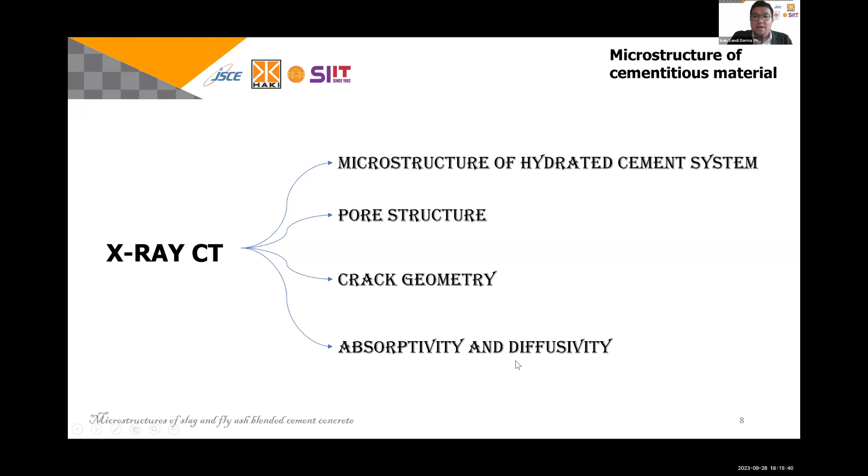Here I try to explore the use of X-ray CT in 4 types of topics: first, microstructure itself, and then pore structure, crack geometry, absorptivity, and diffusivity. For phase analysis or microstructure, here we use synchrotron X-ray CT in Japan, with cement paste specimens at the cement paste level, using OPC and low alkali cement.

In low alkali cement, we use high volume of fly ash, with water to binding ratio of 0.5, and we cure the specimen for up to 146 days. For the fly ash, we use type 2 JIS fly ash. Here I show you the image, one slice from the X-ray CT.

We have a bunch of slices, if I'm not mistaken around 2,000 slices, similar to bread. If you cut the bread, you will have the slice, and then if you try to merge the slices, you have a 3D similar to this one. This is a 2D representation.

We look at 7 days, 28 days, and 146 days. This is from a similar specimen, but a different sample. And then in here, you can choose ROI. What is ROI? ROI is region of interest, the specific area you choose to evaluate.

From the ROI, you collect the ROI, and then you create a new specimen, and you will achieve a VOI, volume of interest. You can imagine in VOI you will have several slices, and then you merge them, and you will achieve a VOI.

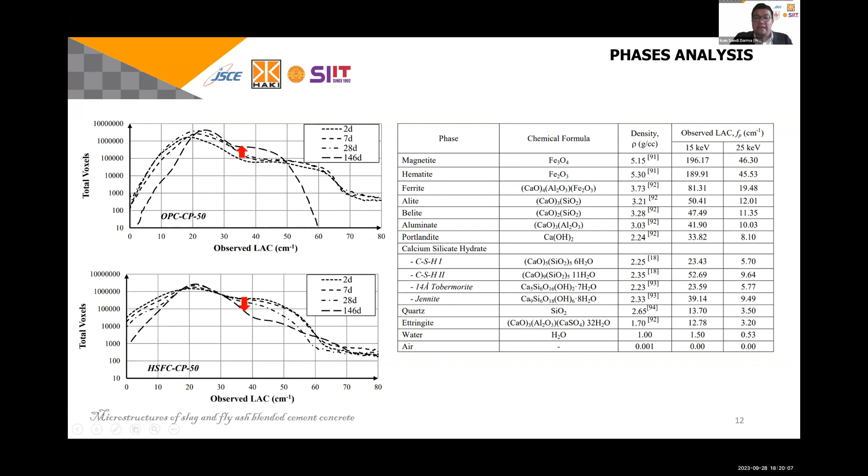There is cenosphere as well as plerosphere in the fly ash. This cenosphere may contribute to high porosity in the fly ash sample.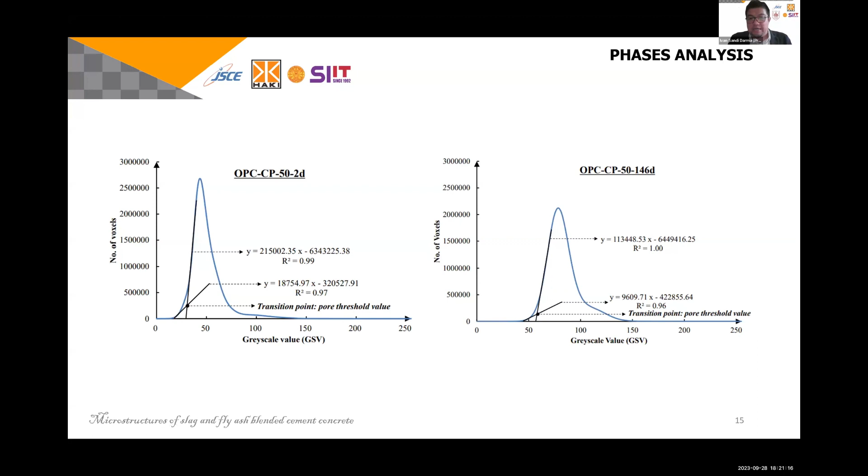For the pore structure, using the same data, I have a histogram here, and I try thresholding to separate between solid and void. Here the red means void, and the gray up to white means solid. As you can see, from 1 up to 3 we will have a very high porosity in both specimens, both OPC and fly ash.

Here we try to evaluate in more detail. We will have percolated porosity and isolated porosity. Percolated means connected from four surfaces, from left to right, top to bottom, and side to side - that's the meaning of percolated. Isolated is isolated - it's not connected from one to another.

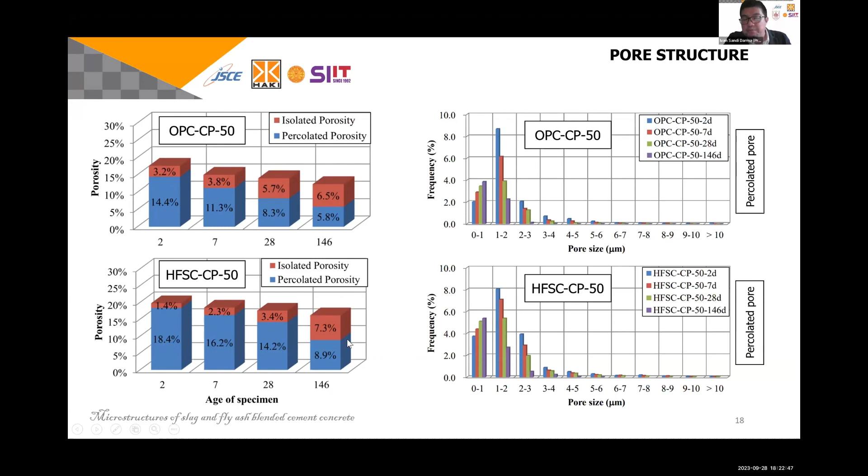Here you can see the histogram shows porosity versus curing period. Of course, for OPC we will have lower porosity compared to the fly ash specimen. But by the increase in curing period, the reduction in percolated porosity is higher than for the OPC one.

Here, the contribution, as I mentioned before, we will have a cenosphere particle here. The presence of fly ash particle in the form of cenosphere, which has a low density phase or void surrounded by a high density thin shell, contributes to the amount of porosity in the fly ash specimen. So maybe this is the answer why in some research we found that fly ash specimens have higher porosity compared to OPC specimens.

We will have the cenosphere contributing to the porosity. This fly ash particle may not react during the curing period and remains in its original form at any time, and might be calculated as isolated porosity during the pore segmentation and cluster multiple labeling process.

For the crack geometry, again we prepare two types of specimen - one conventional, OPC, and one using fly ash. Two types of crack: first generated by flexural load, and the last generated by splitting tensile load. For the flexural specimen, we apply oven dry treatment, and for the splitting test, we apply saturated condition - the specimen was immersed in water for at least 24 hours before the diffusion test. So in this case we will have absorptivity and diffusivity measures.

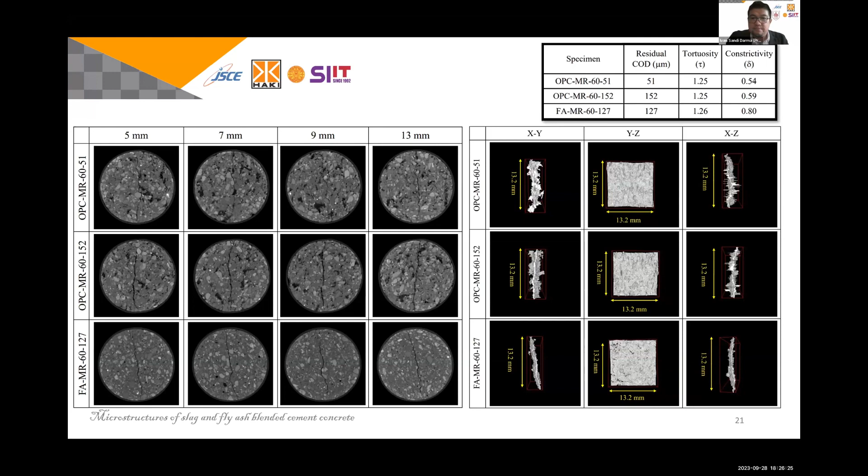And then this is the crack width distribution. We also calculate the crack width distribution using ImageJ, especially for BoneJ. Here you can see, for OPC, the distribution of crack is quite wide compared to the fly ash. It ranges from 0 to 484. For the fly ash, it's only from 0 to 200.

As you can see here, part of the crack in the specimen in OPC were formed in the pore cluster, while some part are around the aggregate. Considering that the pore are connected to the crack, the width formed in the pore region was generally larger relative to the crack width along the crack length. Such condition can obviously lower the degree of crack width uniformity, resulting in increasing variation of crack width along the crack length.

And for the flexural specimen, we also calculate and cluster, and then we have a crack in 3 dimensions. As you can see here, the tortuosity is quite low compared to the splitting specimen. So we can summarize that for flexural crack, it results in lower tortuosity compared to the splitting specimen, and also constrictivity is quite high compared to the splitting test.

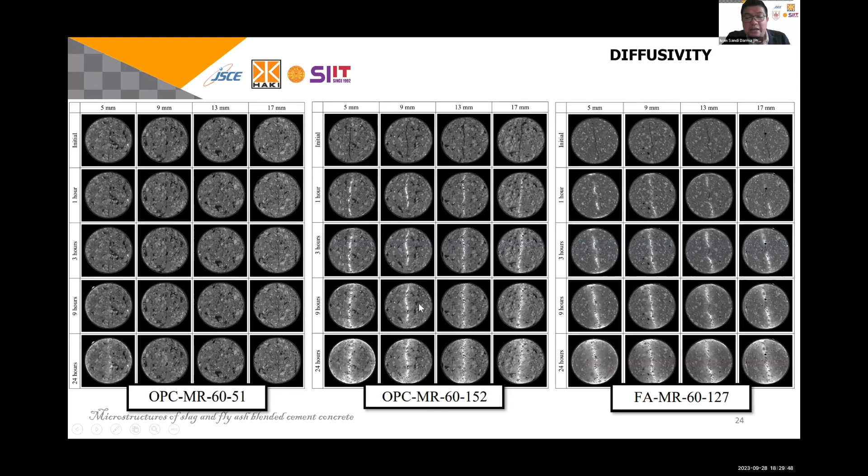This is the thresholding. The observation of the cross-sectional image of the splitting tensile crack specimen exposed to cesium shows that the tracer only fills the crack occupied with water. Thus, the immersion process for 24 hours before the cesium tracer diffusion test unfortunately did not produce a fully saturated crack, leaving behind air pockets. In the next exposure test, the results showed there is no additional crack space filled by the tracer. In this way, the diffusion tracer only follows the path that was formed during the short period of exposure time.

Next, we also calculated the diffusivity along the crack. As you can see here, for OPC and fly ash specimens, the result is almost similar diffusion coefficient. So we can conclude the diffusion coefficient along the crack for every specimen is almost the same - it depends on the liquid itself. So the diffusion coefficient along the crack is independent of the specimen, whether you use fly ash, slag, or only OPC.

And then for the last part of my presentation, the absorptivity test. This is from flexural tensile. The crack was generated by flexural load, and as you can see here, for OPC, the tracer spread out into the specimen, not only in the crack but also the uncracked matrix. But for the fly ash, as you can see, there's a smaller spread compared to the OPC.

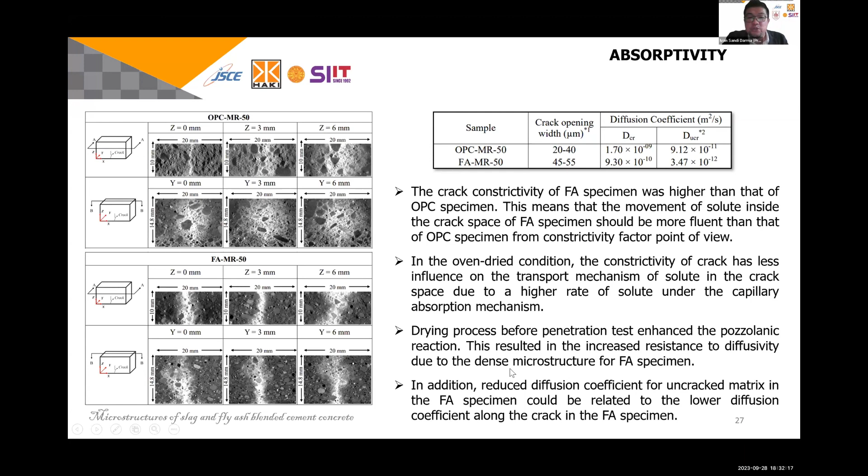Here we can conclude that the reduction in diffusion coefficient for the uncracked matrix in the fly ash specimen could be related to the lower diffusion coefficient along the crack. Additionally, the drying process before the penetration test enhances the pozzolanic reaction, resulting in increasing resistance to diffusivity due to the dense microstructure of the fly ash specimen.

And then, as a conclusion - I might skip this one - but the most important thing here is that it is highly expected that by using X-ray CT, the microstructure in cementitious material will be more explored in a new feature. X-ray CT again can be combined with other testing - you can combine it with diffusivity, permeability.

You may check the change in the crack due to high temperature exposure and recurring, and then apply any condition. Finally, using X-ray CT coupled with in situ tracer diffusion tests would allow further understanding of the transport mechanism of diffusion in cracked cementitious material. And then for the bonus...

Recently we also conducted another test, not only using fly ash, but now we use SAP, super absorbent polymer. Okay, and then for the last, this is... okay. Oh, wait a minute.

Okay, for the last part, it will be presented by my student.

Okay, thank you for the chance. Let me introduce myself again. I'm Abdurrahman Yusuf, a Master's candidate at Bandung Institute of Technology. I will present the effect of superabsorbent polymer utilization in cement-based material using X-ray micro-CT.

Superabsorbent polymer is a polymer able to absorb water up to 200 times its weight. It was first used in diapers and farmland. In concrete, superabsorbent polymer is potentially used as an internal curing medium, where it releases the water it initially absorbed. Superabsorbent polymer has been researched massively in the last 3 years.

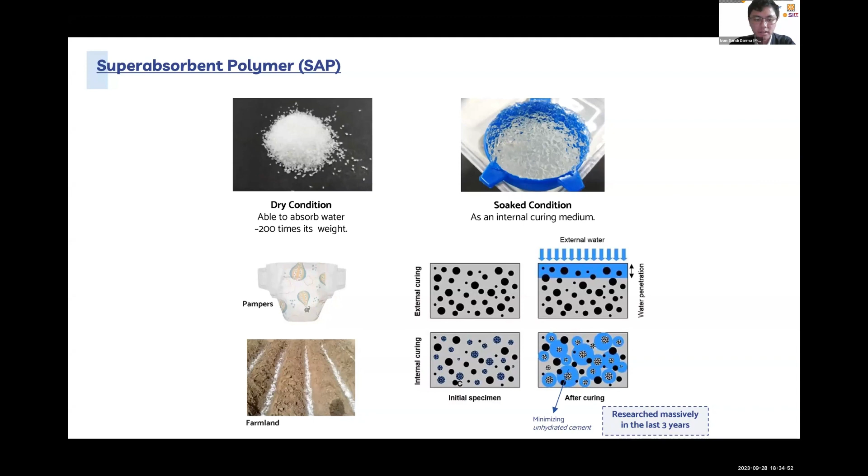For mechanical properties of the specimen, compressive strength tests were carried out at 1, 3, 7, and 28 days. On day 1, delayed hydration occurs, which can be attributed to the retention of water in SAP. However, starting from day 3, the compressive strength of the SAP specimen surpasses the non-SAP specimen. This increment can be attributed to internal curing from SAP, which is evidenced by the failure area of the specimen.

The crush surface for the non-SAP specimen was in the shape of flakes resembling cement powder, while the SAP specimen revealed a typical surface of hardened concrete. This study observed a 17% enhancement and overcome at early age in compressive strength for the SAP specimen, while keeping key variables such as water content, water-to-cement ratio, workability, and compaction consistent. Additionally, this study uncovered the phenomena of delayed hydration from day 1 to day 3, as evident by the compressive strength between days 1 and 3, which has yet to be explored in previous studies.

Porosity of the specimen can be obtained from X-ray micro-CT 3D images. A volume of interest of 1000 voxels was chosen on the pore structure and obtained through thresholding. Porosity of SAP at 28 days is slightly higher, but dominantly isolated, so superabsorbent polymer can be assumed to have no significant influence. Through 2-dimensional pore evolution, we can tell that pores become isolated over time.

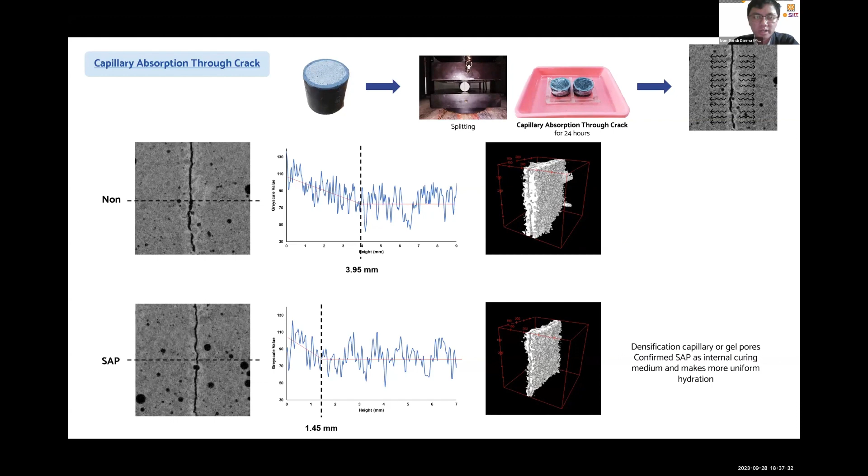To observe durability, capillary absorption through crack was tested. The specimen was split and capillary suction was performed using potassium iodide as a tracer for 24 hours, so we could observe the penetration of the tracer. The non-specimen penetrated almost 4 mm, while the SAP specimen penetrated just around 1.5 mm. This densification of capillary or gel pores confirms SAP as an internal curing medium and shows more uniform hydration.

In summary, we can say superabsorbent polymer is effective as an internal curing medium based on compressive strength and pore properties. Thank you, that's our presentation.

So for the conclusion, you can imagine that the use of fly ash can be combined with superabsorbent polymer as internal curing, and then all of this can be explored or studied using micro X-ray CT, micro-focus X-ray CT. Thank you very much.